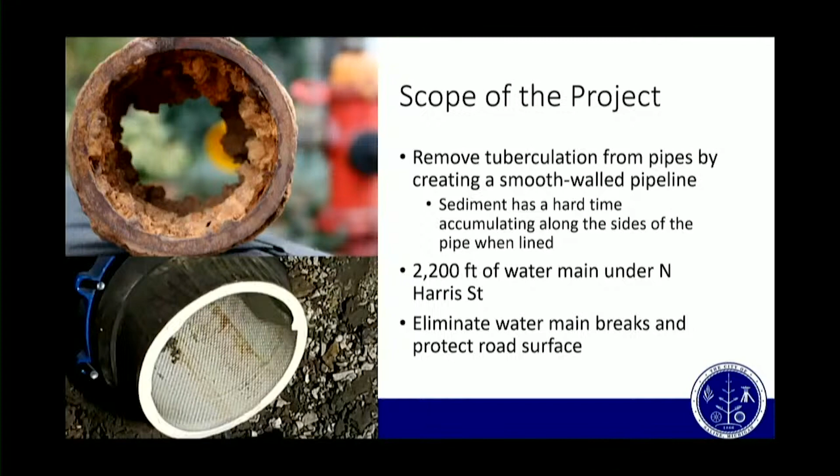We chose this method. We have a visual of open cut where you've got to dig through the street, and obviously that's not the size pipe we're working with, but it clearly shows there's a large disruption when we start excavating the water main out. On Harris Street, the water main is towards the center of the street. By doing the rehab method, the pipelining method, we're not going to have closures on Harris Street. We'll be able to maintain traffic at least in one direction and not lose all of that great asphalt profile.

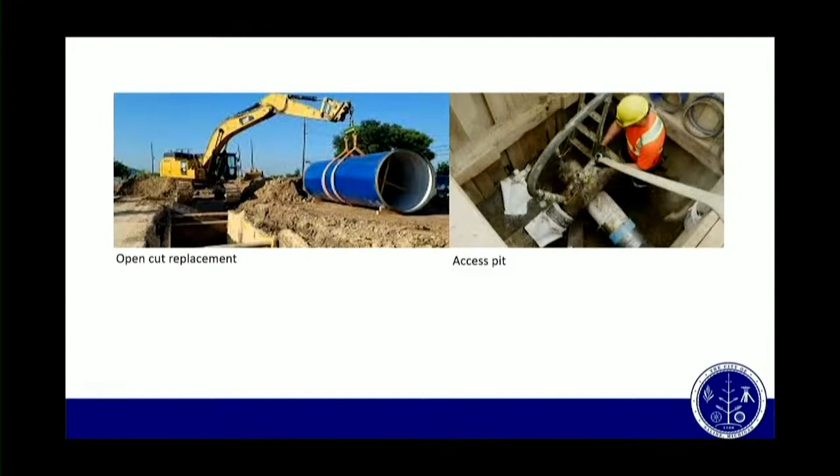And this next slide just shows the project areas that Larry just talked about earlier. This here is Michigan Avenue. City Hall's right here. So it goes from south of Michigan to just north of Henry. The project will go from here all the way up to just north of Clark to the trail crossing up here by Brecken Park. This is 2,200 linear feet of water main that's going to be lined. And as Larry said, one lane of traffic will be open at all times, so you can get through here, local traffic, to get home and such.

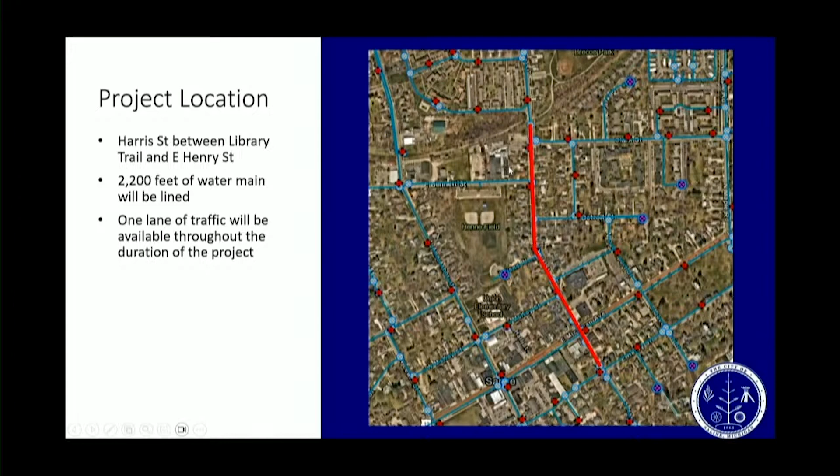Here's a project timeline. We're expecting some traffic control material to be delivered over the next week or so, and getting started with the project, I think on March 18th, this coming Monday. The total budget for this project is $1.2 million.

And to talk a little bit about what Larry was saying earlier about project costs, this linear footage of water main is about what we replaced last year on the East Belt Maple Road project. When you take into account the water main and the road costs for that, this is under half the cost. That cost on the East Belt project for the water portion and road was about $3 million, and this is about 1.2. So that just goes to show how this trenchless technology is saving the asset of the road and improving the asset of our water main, all at a cost savings to ultimately all of the ratepayers of the system.

I think we touched base on most of these things. Traffic control coming this week. You will see access pits in the road. Larry's going to talk a little bit about decommissioning the existing water main and the impacts to residents who live here, how they'll get water during the duration of this project, and we have some videos after that.

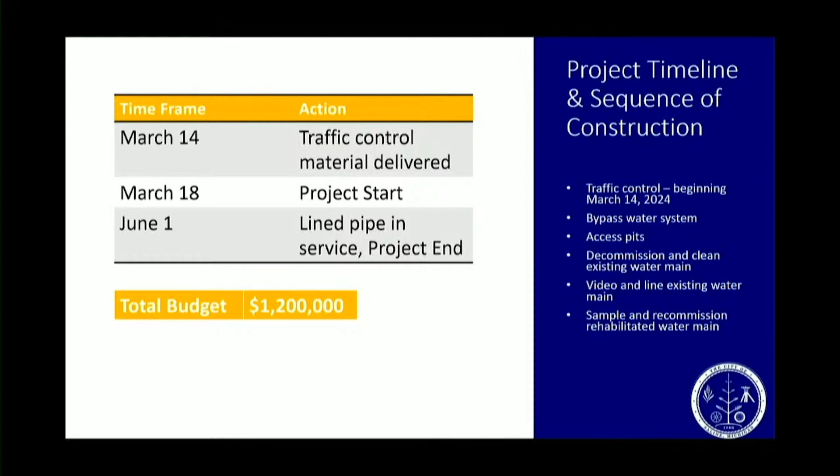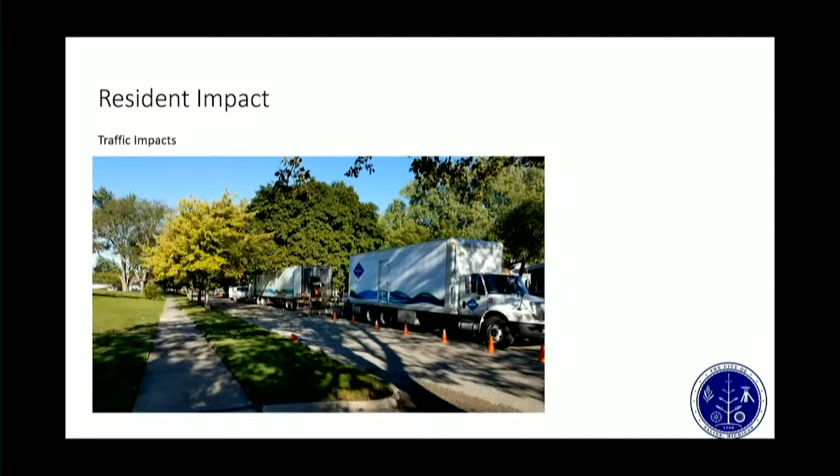And next slide. The picture that's on the screen right now is actually lining in progress. So in this picture, they've taken the water main out of service, meaning they've isolated it. They've already set up the temporary bypass system. And what you're going to see is a couple of trucks. The water liner goes in, gets pulled through the main after it's clean, then it's cured. Then they put it back together. Next slide.

We're going to show you a couple videos of water main lining that really detail the process.

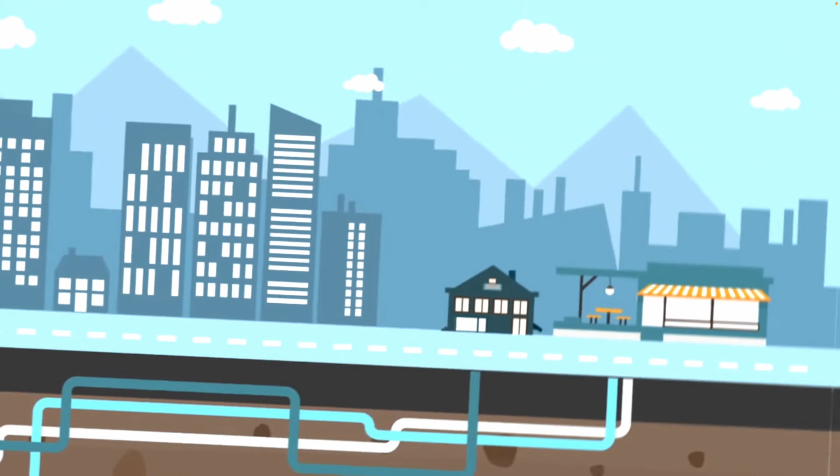Under every municipality, there are large water mains that carry water from the source to businesses and homes just like yours. When these were first installed, metal pipes were the best option. However, most of these pipes have now corroded. When that happens, it causes buildup and breakage, leading to damage and costly repairs. This is where we come in. FERPAL has been helping municipalities rehabilitate aging water mains since 1986. But how, you might ask?

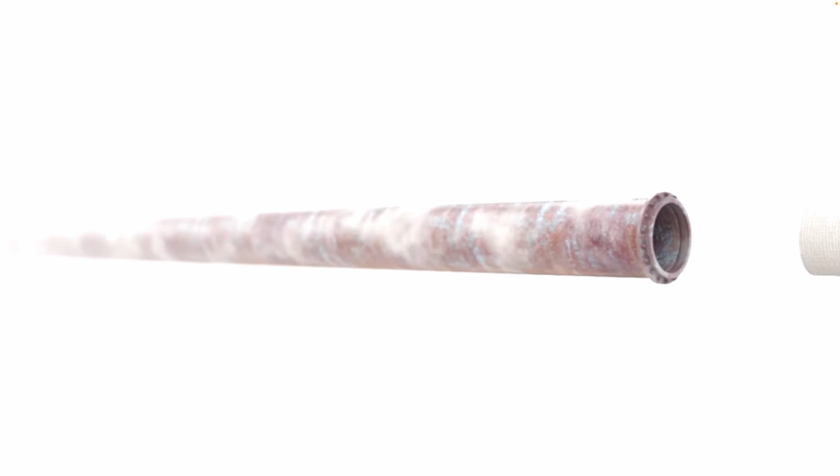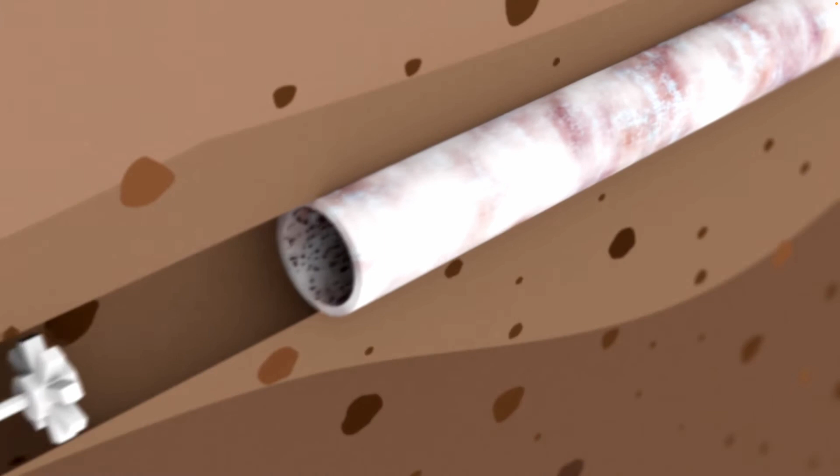Well, that's a good place to start. FERPAL rehabilitates old water mains through a process called cured-in-place piping, essentially building a new water main inside the old one. The first step in this process is installing a bypass system. This means that residents will have water connected to their property at all times during construction. Next, we cut into the water main and clean out any rust or buildup on the inside. Using a metal scraper and high-power water jet, we restore the water main back to its original metal interior.

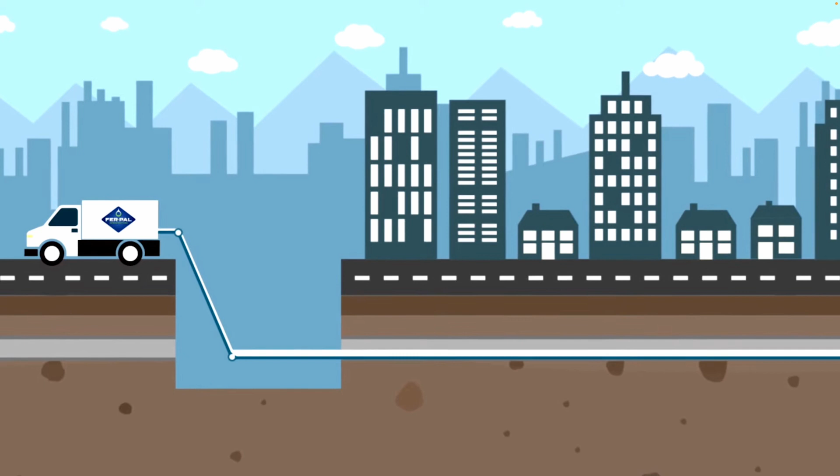After that, we send a robot with a camera into the main. This allows us to see what we are working with, while also plugging the services off the water main to make sure they are left unaffected when lining the pipe. We follow this step by inserting our liner into the water main. The liner is a polyester jacket which we inject with an epoxy resin on site. Once the liner is in place, we inflate it with hot water, allowing the epoxy to cure, giving it its strength. Once our liner has hardened, we send through another robot to drill out the services and re-establish a connection to each property.

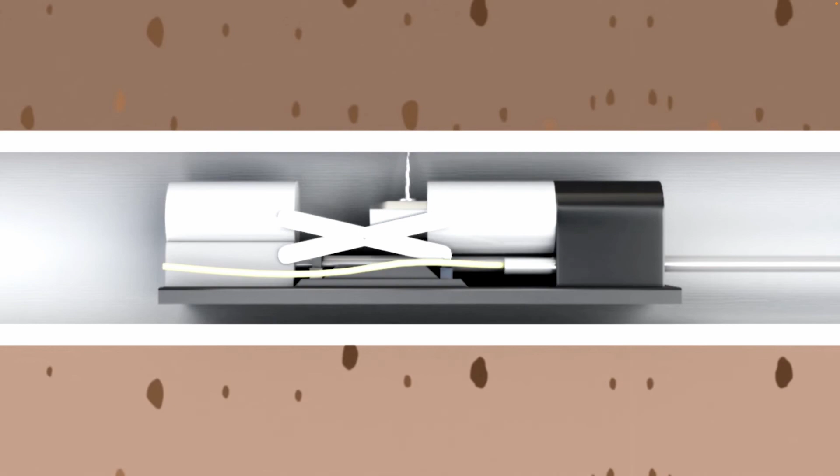After the robot is done, we test the newly rehabilitated water main and reconnect it to the existing system. What's left is a brand new water main without the cost and excavation that comes with a typical water main replacement. Now that you know a little more about water's journey to your home, what do you say we make it a safe one? Ask for FERPAL. FERPAL, helping your community help you.

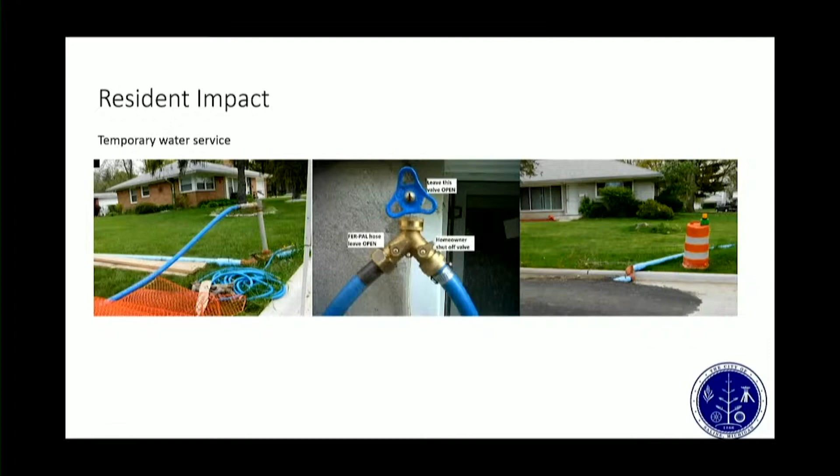Yes, and you see how this is a Y? One of these hoses is the garden hose, and the other one's the service hose. So it will not be the way... Yes, yes.

Still nothing online? Larry, are you phasing it, so part of Harris will be off and then it'll be back on and then it'll go down the line, or is it all off at the same time? Well, we'll get the temporary setup, chlorinate it, bac-T sample it, hook the houses up, and they'll have water. And then we'll take the water main on Harris out of service. So the main will actually go out of service all at once, but the residents will not be without water.

Does that make sense? Because Eric, this project's going to go all in a kind of a sequence. So they'll be cleaning this segment of pipe while they're lining this segment of pipe. They'll be putting this segment back together. They'll kind of leapfrog and then come back. It'll be off the full length. Yes, yep.

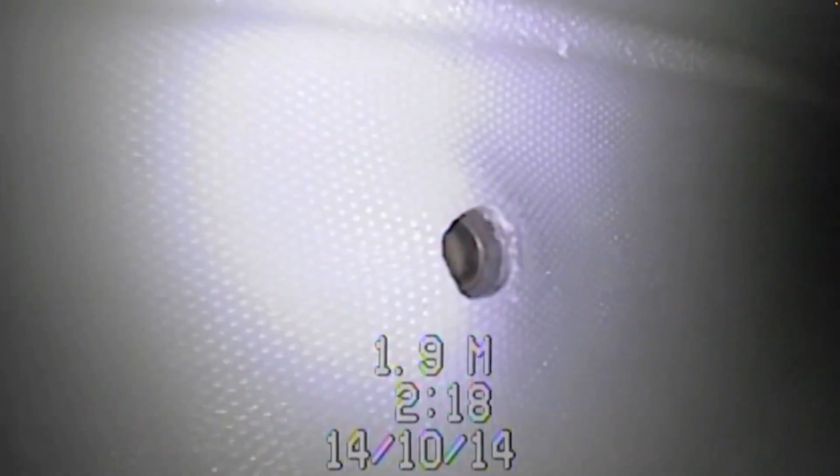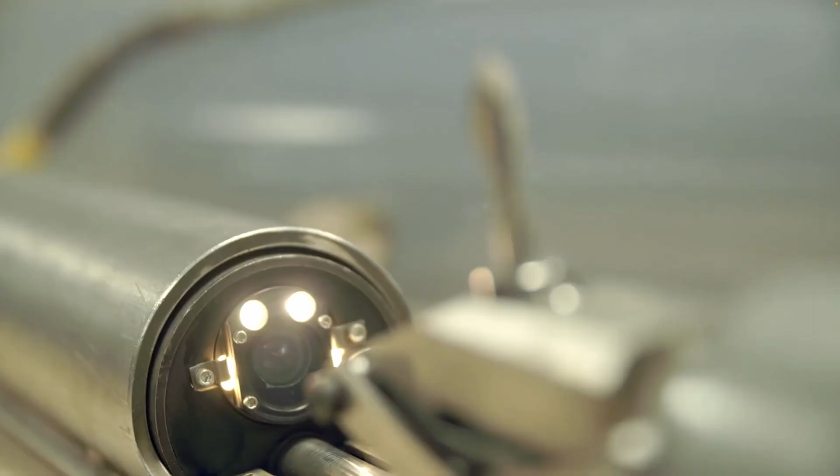Want to know where along the main to drill. And that's a good question. Okay, yeah, that's a good question. They just flew right past that. So the robot that comes in, they insert these plugs. So they drive the robot that has a camera and a little mechanical arm, and he puts an RFID and LED lit plug in the opening from the inside of the corp. The liner goes by and they can either read the RFID or see the light flashing behind it, and that's where the drill knows. The second robot with the drill, that's how it knows where to drill.

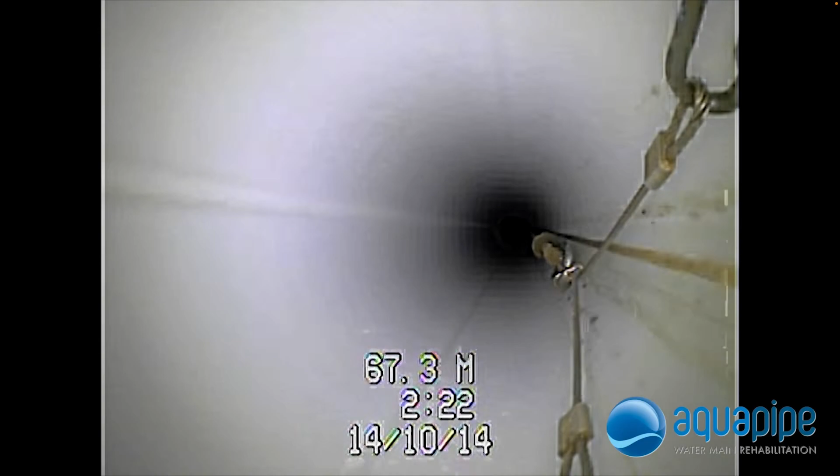And when you saw the video and you've seen that red circle around the main, they actually get in and give it a 3D profile. And if we were in a congested commercial area, they can also get a sub-centimeter GPS location of each service coming into the main. That's when you have a lot of redevelopment on a main and you have a bunch of holes in it and you don't know which ones are live still. But for this one, we don't have to. It's pretty straightforward. Yeah, and it gets us some good data for where the leads are.

So, do we anticipate using this somewhere else in the next couple of years? The lining? Yes. Example? Industrial. Yes. Industrial, north of campus to south of Woodland. Yes, that's our next, and that's the highest frequency main break pipe in the system. And it's the same issue as Harris. Should have lasted longer, but it's not. And we have that in the capital improvement plan for 2016. 2016? 2026. 2026. I wondered why you were looking at me like that.

Just for clarification, it says one lane of traffic will be available throughout the duration. Is it one way then? So which way is traffic flow? We're not sending you a detour, are we? No, we're not setting up a detour. We're sending traffic north, right? Or are we sending it? I'll get back to you on that. I can't remember. It will be one way, and I can't remember which direction. Okay.